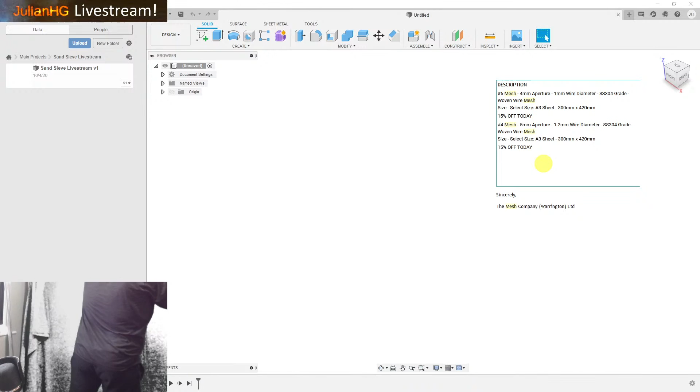I can see my shiny face. Oh, I forgot to do my green screen. One sec. See, I'm such a pro. Right. Oh, right, calm down.

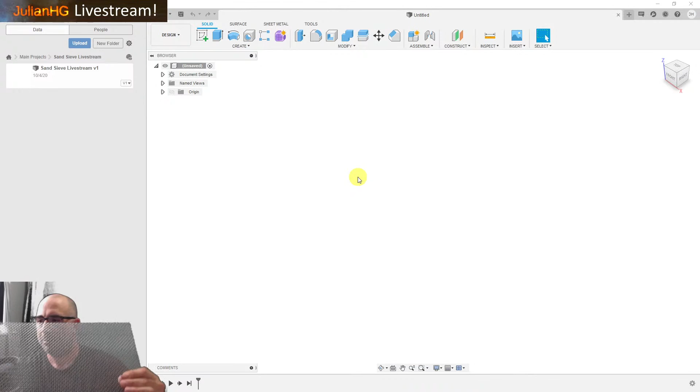And print it, and then in part 2 of this we'll be casting it. Now the plan is, I don't know if you can see this, but I've purchased a sieve. It's actually stainless steel. So the problem with greensand casting is it's always the sand prep, and all I've got is a gardener's sieve, and the wire mesh on it is actually quite sharp, a bit like cheese wire.

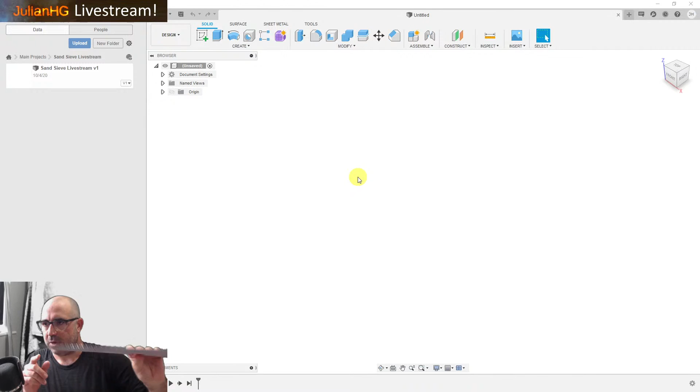So my plan is to cast a shape through this, or with it, so it's kind of cast into it, if you see what I mean. Let me just see if I can - yeah, the plan is to make a sieve shape in the drag, and the bottom of the sieve in the cope, and then cut this out in the particular shape required and put that between the two. Now this does have thickness, so there's a little bit of a difficulty - obviously the cope and the drag might not sit together nicely. I mean, it is a sieve, it will compress slightly in the sand, but there are some problems.

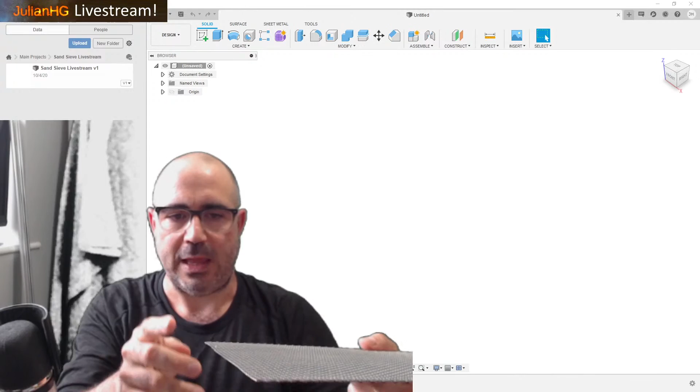I want the aluminium to flow up to the edge and across the sharp edges here, but I don't want it to keep flowing in the gap and basically fill the whole thing, becoming an aluminium sheet with steel reinforcing. That would be really bad. Equally, once the aluminium is flowing in, it might actually spill out of the gap.

Because the cope and the drag are actually separated by the mesh, I don't know whether to make a pattern for the mesh, and when I'm doing the cope and the drag, actually account for that thickness. I think that's probably the way to do it.

But anyway, let's actually get going on Fusion 360.

Now, I know most of you guys know all about designing patterns and things, but I'm just going to talk as if you aren't my main audience and start from basics. So obviously when you're sand casting, you want a pattern that you push the sand aside with, then you remove the pattern, and it leaves a void in the sand. You then fill that void with metal, it fills the void, and you've got a solid object made of metal, the same shape as the pattern. That's basically what casting is.

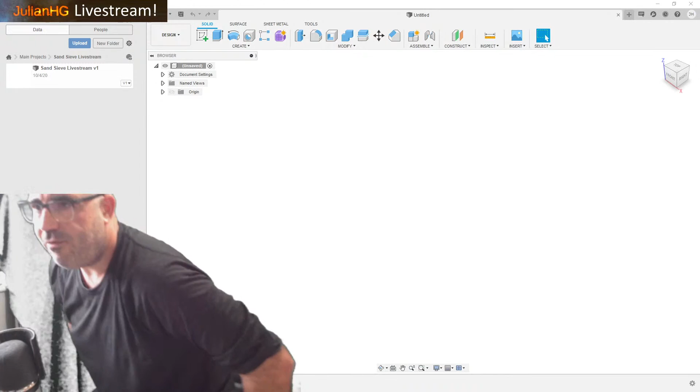Let me just shrink myself here. Oh, look at my terrible green screen, what's going on there? Let me sort that out. I'm doing some office upgrades, and actually I need a proper green curtain, like a curtain rail I can hang it on, because there's a big bunch of shelves there, but they end, and there's another corner. Anyway, irrelevant.

So let me just shrink myself down here. The first thing I'm going to do is the shape of the flask. I've written down all my flask sizes because I've made this mistake before - make a pattern you think is an awesome idea, and then it won't fit in your flask. There needs to be a bit of a gap around it. So this is a completely brand new design in Fusion.

I'm going to create a sketch, and have it centered. Can you guys see that? So let me do the actual outline of the inside of my flask - this is my largest, 317 by 435. So let's do 317.

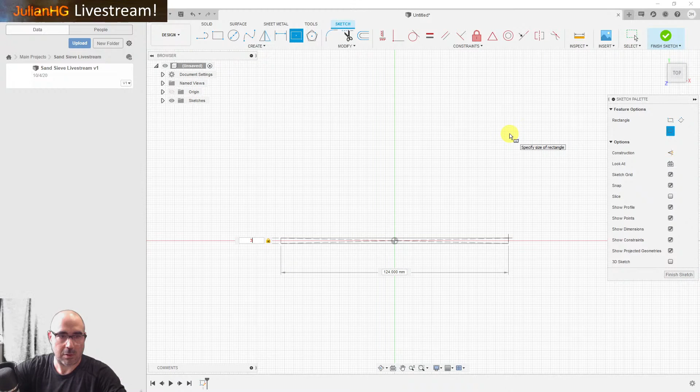Oh my goodness. I cleaned my keyboard and some of my keys aren't working. Brilliant. 435. Okay.

Oh, I've also got to show you guys this thing - I got this about two months ago. It's a mouse, but a digitizer, specifically meant for 3D applications. So I've got a mouse as well, and I use one of these rollerball mouse things, but using this I can spin and look at stuff at the same time as pointing with the other mouse. See, I've ruined it now.

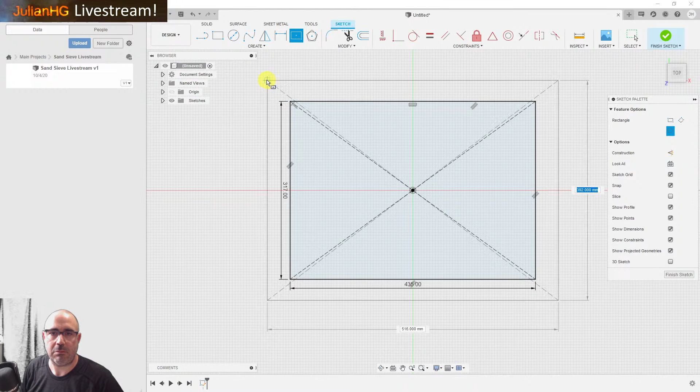Right, let's get organized. So this is the shape of the inside of my flask. I'm just arbitrarily going to make it - I don't know, that isn't the actual shape of the flask, but let's just make a flask.

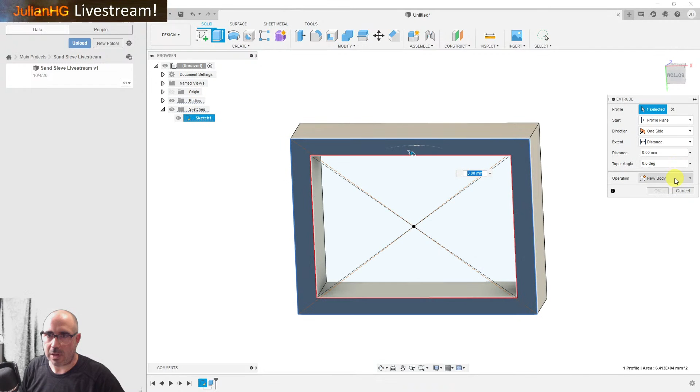Now the flask itself is 132 in depth. New body. I'm going to make the cope and the... silly boy. Okay, so I'm going to make a new body, this one's 99, so I need to make that minus 99.

So this was the flask I used to do my kettlebells. And it's huge. Oh no, what an idiot. Okay.

New body. Oh my goodness, I don't know what's happened. Minus 99, new body. Okay, phew, right, what a plonker.

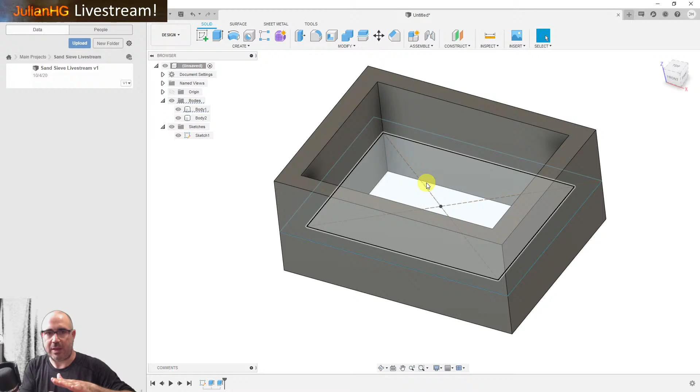So that's essentially the size of the flask, and this blue rectangle in the middle is where the sand meets, and that's the parting line. So that is where the mesh is going to go on this flask, on this sieve. So basically I'm going to leave it like that, and now I'm going to start a new sketch, and now we're going to do the actual sieve.

Now I reckon I need a sieve that is 26 centimeters by 26 centimeters. Something's going on with my keyboard - really bad, I shouldn't have bothered cleaning it, should I? I was so embarrassed by the state of it. Okay, so that's 260 by 260.

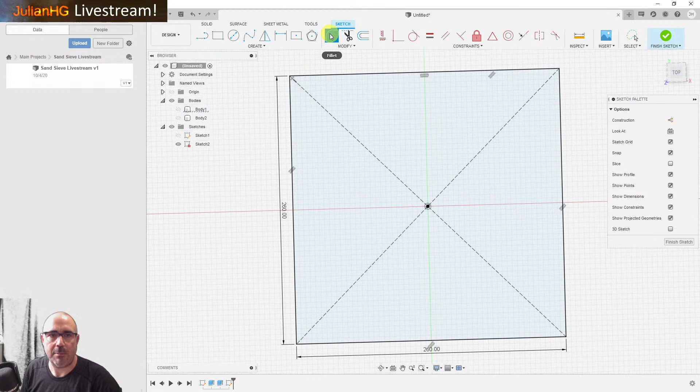Because we're casting it - yeah, thanks Taz, I will do that - and because we're going to cast it, I might as well make it nice and curved on the edges. Now I'm not an expert on Fusion 360 by any means, but I discovered this fillet option here, and you can literally pick two corners, and I think a radius of 30 would be nice. So this is actually a very simple design, it shouldn't take too long.

Radius of 30, and again last one.

Okay, so that's the outside dimension of the sieve, and once I add this offset, I think you'll see where I'm getting to. Now the base of the sieve at the parting line needs to be about 10 millimeters wide, which is quite wide, but I need it to be able to kind of flow onto some mesh. So I need at least 5 millimeters of mesh to grab it. Another problem that could occur is the mesh might warp once the molten aluminium is poured in. Basically, this is literally just a bit of fun, I don't know what will happen. So I think 10 millimeters.

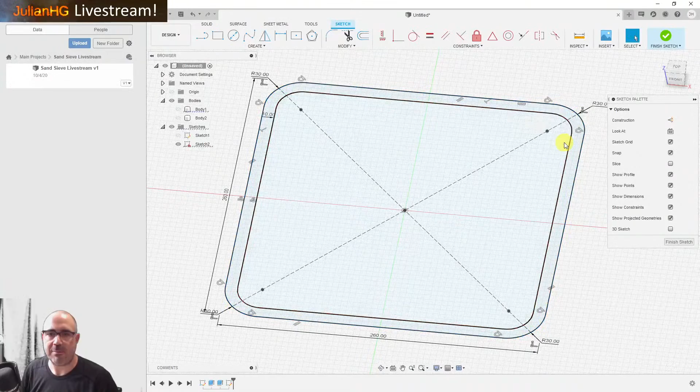And essentially that is the sieve, sliced through the parting line, and all we're going to do is extrude the top. But being a sand casting type operation, we're going to do some draft on it. Now, because it's quite tall, I'm actually going to have a very slight draft of -3 degrees, and I want the whole thing to have draft to it. That's to enable it to be pulled out of the sand. I've written some measurements here. One sec. Okay, so I think I want to make it 60 high.

So essentially that is the top part of the sieve, and this sort of edge here, in fact I might put the mesh in. Let's put the mesh in.

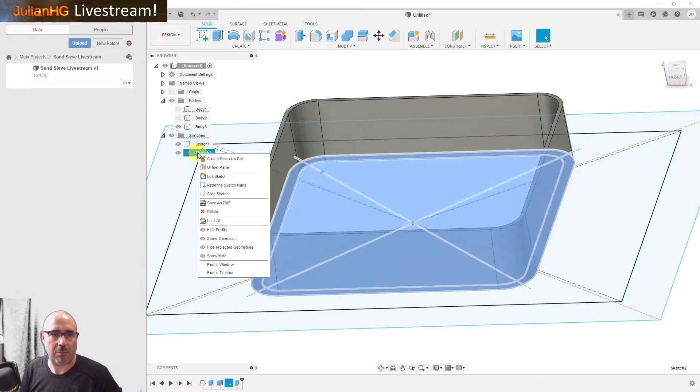What we need to do is for the mesh, can I do another offset? Okay, don't be like that. I know, finish sketch, I'll do another sketch. Create sketch on the same plane. And what I will do is, let me get rid of that, I will project. Sometimes Fusion does do some silly things. I will project the sketch through from the other sketch onto this sketch.

Okay, so hopefully, yes, I'll be able to offset. Basically, I want it to be the same shape as this, the mesh. This is just a simulation for the mesh, obviously. Now I want the mesh to go inside the aluminium. By how much? I don't know. I reckon 4 millimeters, I guess that's a good size. Maybe let's go with 5. I can always sort of adjust, this is just kind of guesswork.

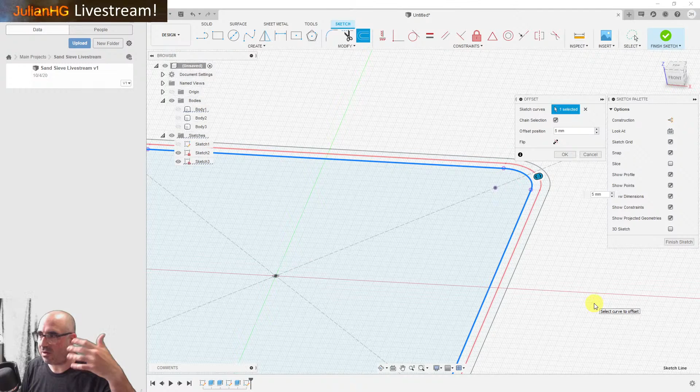SW Dweeb, hello mate, how's it going?

So the mesh, incidentally, I think I spoke to Perry, SW Dweeb, about my sieve idea, I don't know, was it like a year ago? And you'd had a similar idea yourself. So right, what's going on here? Okay, so I can select that and that. Now the mesh, I'm just going to make, I think the mesh is 3 millimeters.

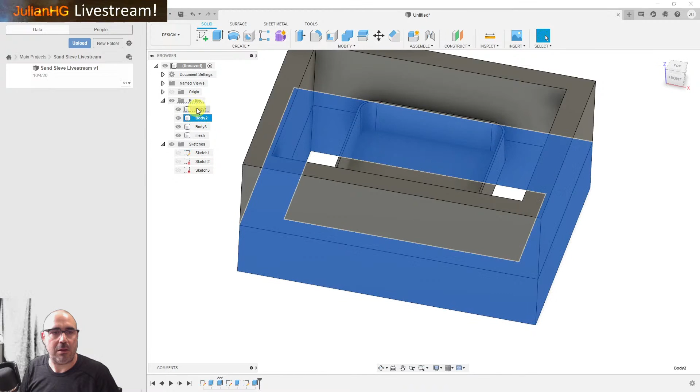I'm just going to label up my. Now let's add. So now we've got the cope, the drag, the mesh, the top of the sieve. Let's actually, that one there is the drag. This one is the cope. I'm going to call this the. What am I going to call this? Top of sieve. By the way, can I just formally say that the word sieve is a terrible word, I cannot spell it.

Let's get rid of the drag and the cope. So right, that's the sieve. And as you can see, I might actually colour the, I'm going to colour the mesh.

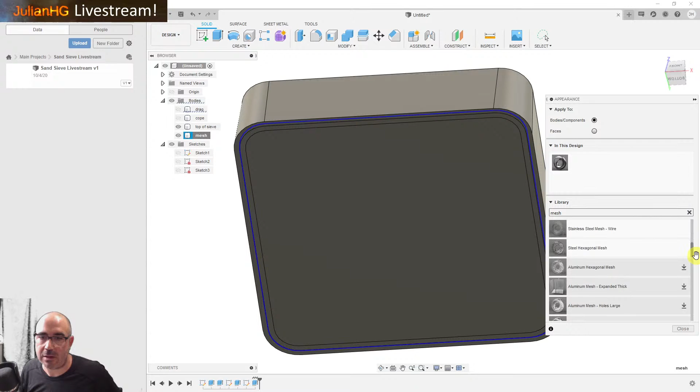Favourites, now I've got some favourites down here. Ooh, have I actually got mesh? Oh, stainless steel mesh, that'll do. Hexagonal mesh, stainless steel mesh wire, that'll do. Okay, so perfect.

Yes, Tobo, I think that is a good idea, because it does have thickness and because it's got such a large area, I don't think the cope and the drag are going to sit nicely together. It's not like you're putting a little tiny inch by inch bit of mesh on there and it will just squish through, the sand won't squish through. So I think that will be a good idea. But whether it needs to be in the drag side or the cope side, I don't know.

Perry says, I keep thinking I need to make one of these as well. I was assuming I'd cast the mesh into the sides. Yes, that's exactly what I'm going to try and do. But when I'm making the mold, I'm pretty sure the mesh, because it's quite big, will separate the cope and the drag, and I don't want aluminium pouring out the sides.

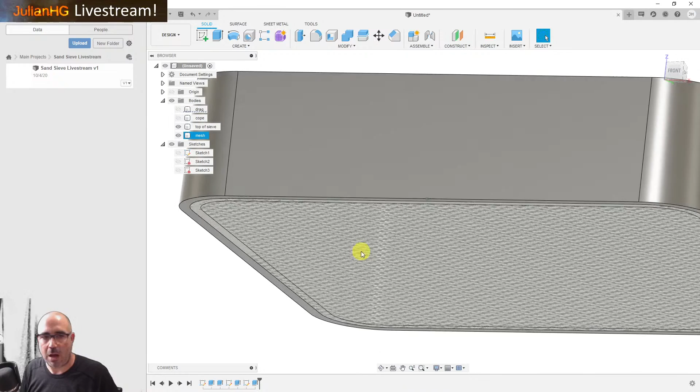So yeah, I think that's a good idea, Tobo. I think that is the plan. Essentially, I'm going to 3D print the mesh thickness, but by how much I don't know.

Also, another problem is, once the aluminium goes into here, there's not a lot to stop it flowing into the mesh itself, which is good because that's where it's going to be held, but there's not a lot to stop it. I'm hoping it will stop at least once it hits one of these horizontal wires. I don't want it to keep flowing in and out, because the mesh is obviously like a weave, not actually a wall to stop the aluminium. So I don't know, I'm hoping it'll cool when it hits the mesh itself, but not so much that it doesn't actually impinge a little and hold it in.

So right, we're nearly there. All we've got to do now is do the bottom, and all I'm going to do is select the bottom there and extrude it out. Now, I don't know, I'm saying maybe 10. I'm literally making this up. 10 millimeters, and I can afford a larger taper on this side.

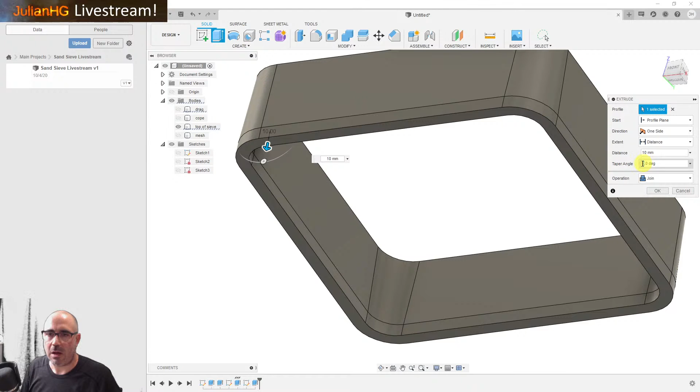7, that seems a bit much. Let's do a 6 because it's only small. Because I actually want a bit of the width here, because I might put one of my... Actually, no, let's go with 7, try and reduce some of the aluminium. So I don't want to join, I want to make a new body.

Okay, so this is bottom of sieve. Is it EI or IE? It's IE. All right, so that is essentially the whole thing.

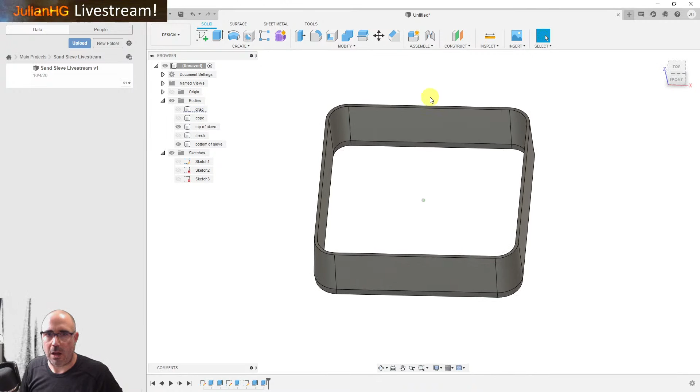Now I just need to think about how I'm going to print it. Now the trouble is, this is too big for my printer. So what I like to do normally, especially if I've been fairly careful from the start like I have now, I've designed the whole thing with this origin dead center. So it's actually very easy in Fusion to just grab a whole what they call a body.

This top of sieve is called a body, and I can just slice it. So I'm going to split the body, and I'm going to use the origin. I'm going to split it down the whatever that is, I think that's probably the X, Y, or Z, it's one of those two. So I can split that. So that is now split into 2, I've got this side and this side.

Now I'm actually going to split it again, because essentially what I'm going to do is print it in quarters, because then hopefully I'll be able to stack them like chevrons on my 3D printer. I'll certainly be able to do 2. But that does give another problem.

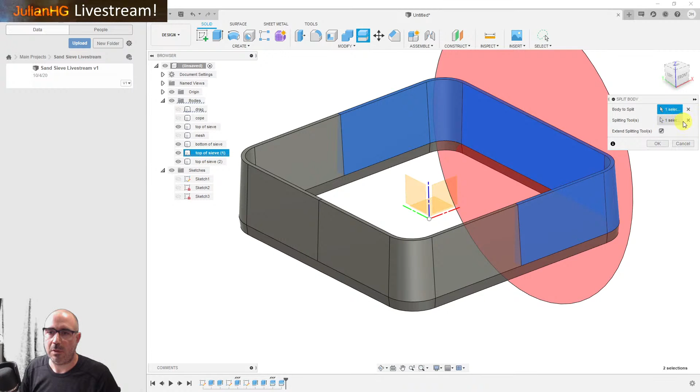So I'll split this one, and I will use this axis. As you can see, it's going to slice it through there where the pink is. Great, and do the same for this one. Splitting tool there, got a bit confused. Right, so that is the top of the sieve, split into 4.

I need to do the same for the bottom of the sieve. So I'll select that, split this using the same 2 axes. That's that one done, now I just select this.

Incidentally, Perry, did you see my fancy mouse? I don't think you were here at the start when I mentioned it. It's so cool, I think you'll be very jealous.

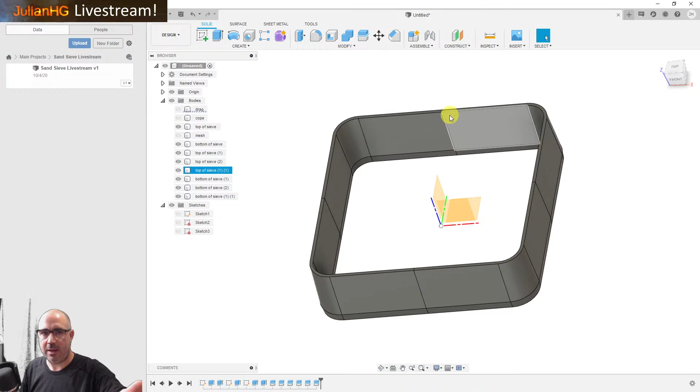And I'll just split this one as well. Okay, so that is the top into 4 parts and the bottom into 4 parts. And because it's square, essentially, we can actually just print one corner and do it 4 times, if you see what I mean. This could be modular in a way. I could make an extension piece in the middle if I wanted a rectangular one.

So the trouble is, because this is going to be printed in 4 corners, not all in one go, I don't have a big enough printer, I'm going to need some sort of registration thing going on to keep everything together. And it's also nice when you're pulling out the pattern, if they're all really flimsily held together with superglue, if you pull out the pattern, there's a good chance you might pull the pattern apart and just ruin everything. So I'm actually going to, let's see, which ones are we going to use?

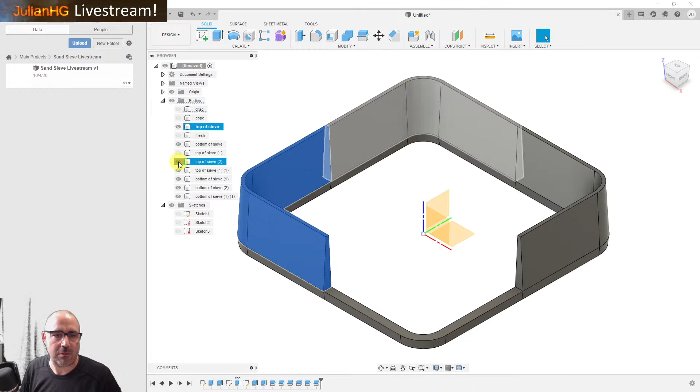When I go like that, okay, perfect. So I'm going to use top of sieve, I'm going to keep that one, I'm going to hide these. And I want this one. Perfect, I'll hide all of these. So that's really what our sieve has come down to.

In fact, I'm going to colour this. Appearance, I'm going to make the top green for no real reason. And the bottom I shall make red.

I hope you can't hear my... Oh, you didn't hear that? Did I see what? You didn't see my fancy... I hope you didn't hear my stomach rumbling. It's because I've just scoffed a sandwich in about 30 seconds.

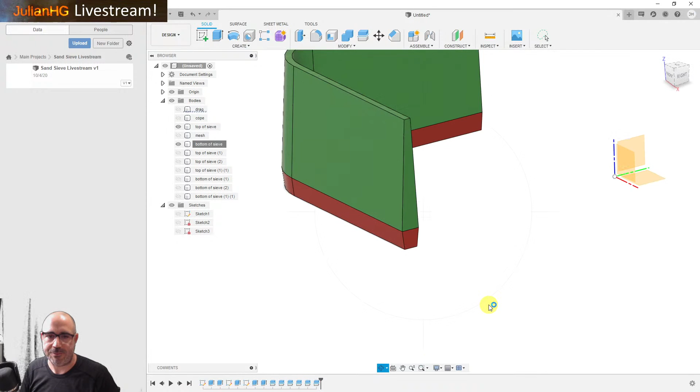Check this out, Perry. This is an amazing 3D mouse. I can pull and push, rotate, spin. It's super fancy, and it's also lovely and smooth. Before I had this mouse, I would have to use this other thing and kind of be jerking around, and it's just no good.

When I print this, I'm going to print 4 of these, and I'm also going to print 4 of these. Now the flat bottoms where they meet, that'll be the bottom of the print surface. That'll be nice and flat, so when they're in the pattern they will meet nicely.

And I need a few things. I need to be able to registrate, so I need registration pins, the ones I use on all my patterns now. Let me zoom in - see these little things here? Super small, but they have extremely good tolerances and they're really cheap. I get them off Amazon.

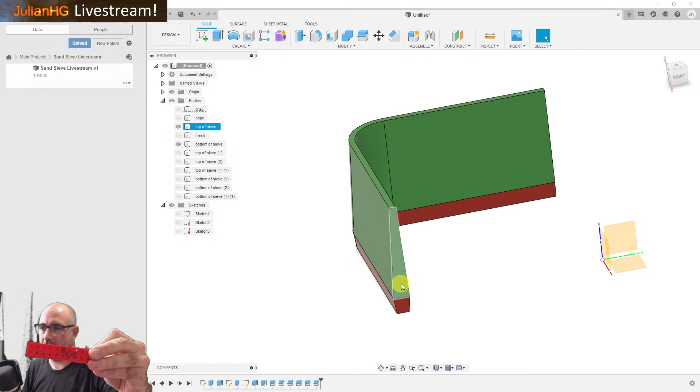So let's see, we've got the top of the sieve. I'm actually going to do the sides first. Now I know from experience, I printed a little block here on my 3D printer, and I know that for a nice loose fit, it's like 3.2 millimeters, 3.25. Actually this one's 3.3, and that's a nice loose fit.

But if I want a nice tight fit, i.e. holding the bits together so they don't come apart, I've written it down here, 3.15. So if I make a hole of diameter 3.15, this is a really nice tight press fit.

So what I'm going to do is put a hole here - sketch, circle - I'm going to zoom in. So I think, now what's that, 5 millimeters? So I'm literally going to put a circle there, 3.15.

I'm only going to make one of these pins. So this is going to be my pin here. I've made a circle, and like everything in these 3D softwares, you essentially just extrude.

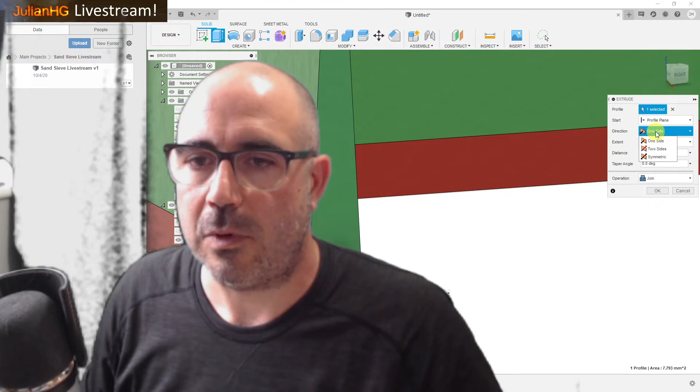Now I'm actually going to do it symmetrically, and do the whole length, and make the whole thing. Now the pin is actually 25mm, but I want the hole to be 27mm, so there's a little bit of play in case a bit of plastic gets stuck in there. There's nothing so annoying as putting your pins together and then the actual parts won't squeeze together. So a little bit of leeway is good.

So I'm going to make a new body, and this is like the negative of the hole I want. So this is now - there's the pin there. It's 27 long instead of 25, but it's the right width for a tight fit. Okay, so I'm going to call this pin 1.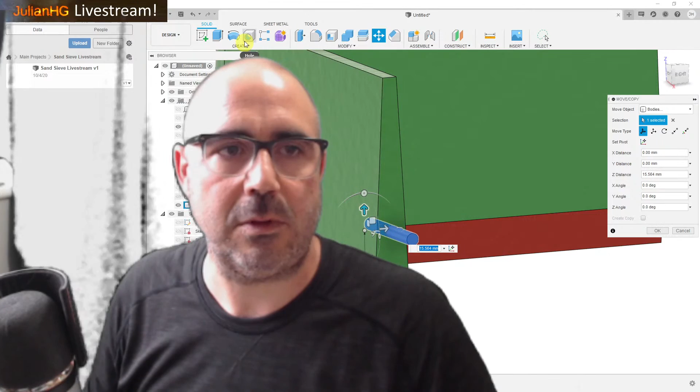Now I'm actually going to copy this part. Super easy - right click, copy. So right click, move - and when I'm moving something, I can also copy it if I click this. So I click copy, shove it up.

Now I've got to be a bit careful. I want another pin up here as well. So don't forget, these pins are to join the 4 quarters together nice and tightly. But if I put them too high up, it's going to impinge on the side. Now when you're 3D printing, it's a bit like toothpaste coming out of a tube - there needs to be a certain amount of thickness around a part, and from experience, this is too high. I need it to be - I'd say around here is probably fine.

So why don't I just make this 27? Okay, so I've moved that pin up here, 27 from where it was down there. So now I've got 2 pins.

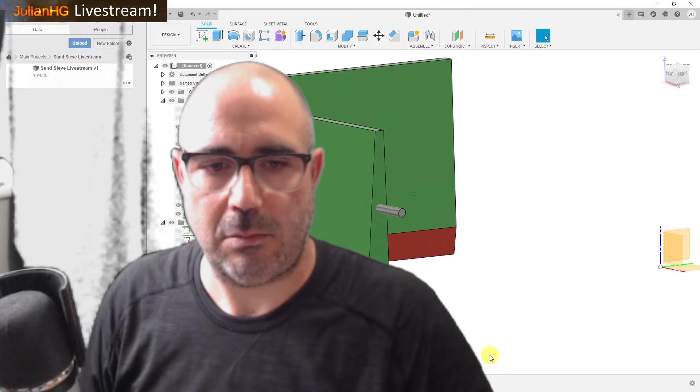Perfect. Actually, I should have been a bit more cunning. What I like to do also is just put a tiny chamfer on the hole. It just makes it a bit more accurate. 0.3, so I'm going to have to do it for all 4 of them now, which is kind of annoying. The 4 ends. Okay, so chamfer 0.3. As you can see, when this gets printed, there won't be such a... I mean it's only a small thing, it's 0.3 millimeters, but I like to put a little bit of chamfer on things when I can. So right, there are the pins.

Now I'm actually going to move, I'm going to copy this one and put it down here too. I'm going to put one in here, and it looks to me like 10 millimeters is just where we want that.

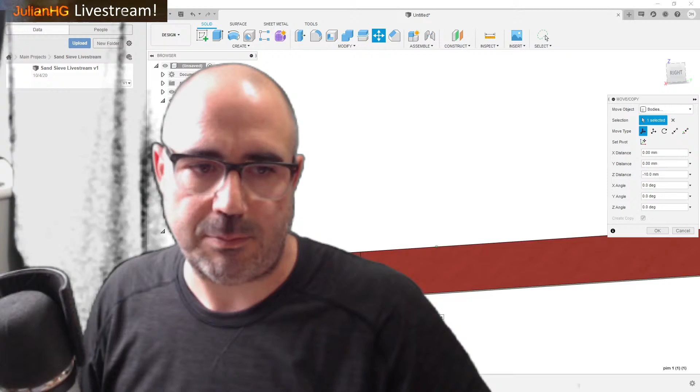Oh, I'm sorry, my face is so massive. Can't see over your shoulder. Thanks Paul, sorry, I wasn't looking at the chat. I need to do like 6 things at once. I've got to tell you, it's a miracle it's going this well. Seriously.

Okay, I'm about the right size now. So that's a 3rd pin. So now I've got 3 pins.

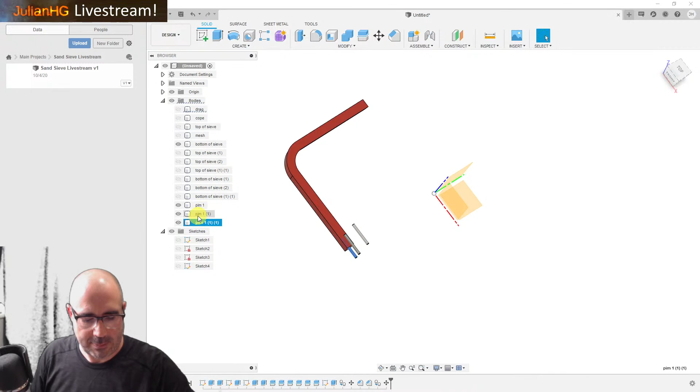And the beauty of this is, if I want to get fancy, I can actually, because I've made it around a square, select these 3 pins, right click, move and copy, and make another copy. So I've got 6 pins now. Each one of those blue things is actually 2 pins together, but I can rotate those around the origin. So I can select this pivot and make it the origin. And then I can spin it around. So there we go, I've got 6 pins now and they're all in the right place. So I click OK.

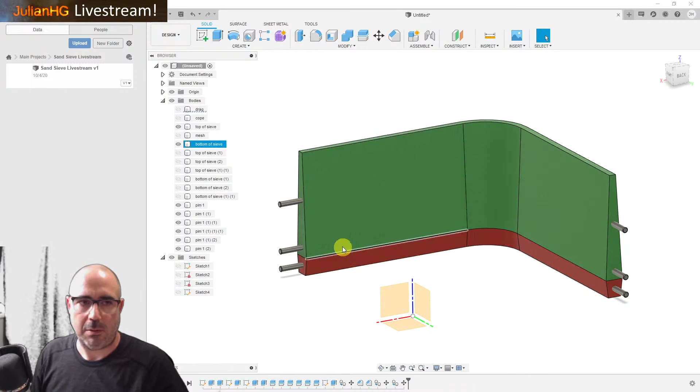Perfect. Now if I put top of the sieve back, essentially this is the whole thing done now. What I might do is put 1 pin going vertically between the 2 patterns. I don't know, I think I should probably do that just for completeness.

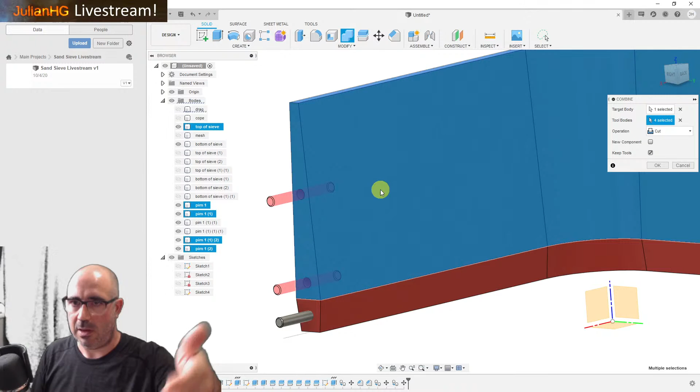But what I'll do now is just show you how to make this, in case someone's watching that doesn't know how to do it. You select the part you want to make the hole in. Basically lots of these programs work by subtraction and addition of solids. Because I've made this pin, this is the shape I want the hole to be, not the pin, I can select this whole object and combine it with these things here. I've got it set to cut, and it's going to cut those pins out of this blue body. Now I'm selecting keep tools because I actually want to use these tools, I want to keep them. If you had that unselected, it would use up these pins in this operation, but I want to hang on to them. So I'm going to keep the tools and click OK.

Now what you'll see is, if I just delete that, now we've got a hole. And not only that, it's actually chamfered at the back. Okay? And same for this one, and the same at the other end too. So I'm going to delete that.

Not delete it, I'm just going to hide it. And I hide that. Now I'm going to do the same operation for this bottom of sieve. So I select bottom of sieve, combine it, select my tool bodies, that's already set to cut, it was what it was on before. Select the pins, I'm keeping the tools. Okay, now I can hide those pins.

And voila, super duper. Basically, if I just print 4 of those green corners and 4 of these red corners, that would be the entire sieve pattern.

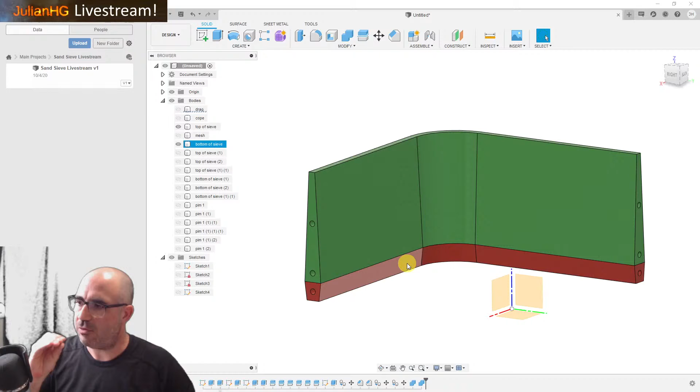I think I'm going to have to account for, like Tobo mentioned before, the width of the mesh, but I possibly... how long have I been streaming for? Oh my goodness, for 39 minutes. I probably won't do that now.

If I put the mesh in, you can see here the idea. Essentially, I'm not really sure where I'm going to put it yet. I think I probably will put it in the green, which is the drag. But the mesh, so it's going to be like this. In fact, let's do this properly.

Top of sieve, I want to hide the bottom. Top of sieve, top of sieve, top of sieve. Okay.

And we want the drag. So, essentially, I've rammed it full of sand. And I think where this mesh is, I need to have - well, it's obviously when I'm ramming it up, it'll be this way up. But where this mesh is, I think the red side will be easier to draw out of the mold.

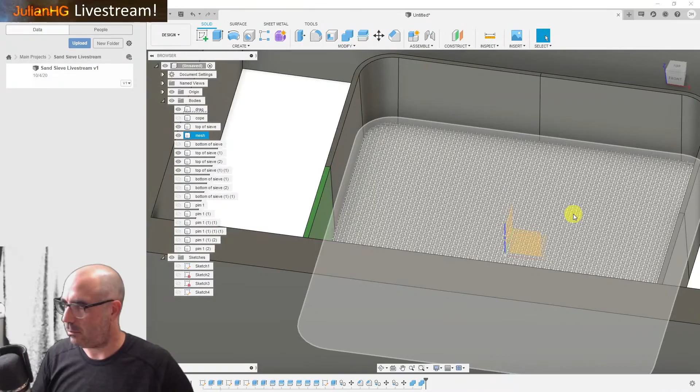Yeah, you're probably right. I'm only putting it on this side because of the kind of small size of the red. My goodness, my brain. But basically, it doesn't matter which way.

What I'll do is print, like Tobo said, and this was my original plan, a spacer that would take up the space of the grid, the mesh. That will enable, hopefully, assuming I've cut the grid roughly carefully to the right shape, that that will stop the drag and the cope separating and aluminium pouring out the sides, or places where it shouldn't, if you see what I mean. So that's the kind of plan, and I'm hoping at this boundary where they join, that's what's going to hold the mesh in the actual sieve.

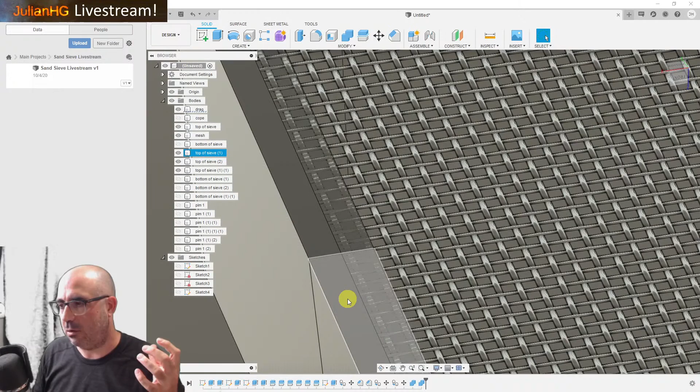But like I said before, the mesh might get too hot, it might warp. It might warp while it's molten.

YouTube's telling me the stream has gone bad. It's got 4 bars still. I'm just going to plow on.

But it might sort of warp, it might expand once the mesh is hot, but then it might kind of freeze whilst it's bowed and hot. I don't know, it could be a total disaster, but it's kind of a nice exercise - I wonder what will happen. Also, it'd be nice to have a little sand sieve that's got nice round corners.

I've got a feeling when you look at the sieve finished, there's going to be quite a bit of aluminium overspill in these first rows of the grill, of the kind of grid. I don't know, that's probably going to be a thing, but it's a bit of a fun experiment.

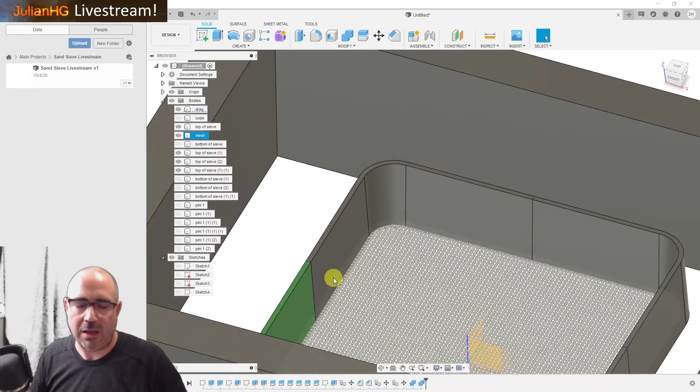So I'm going to get rid of the drag. I'm going to bring back the bottom of the sieve. In fact, I'm going to get rid of all the extraneous stuff that we don't need. So we're back to this.

Now I'm going to quickly take one of these pins. I'm actually going to put a pin here between the two. Let's copy this, move and copy. Create a copy, so I'm going to move it

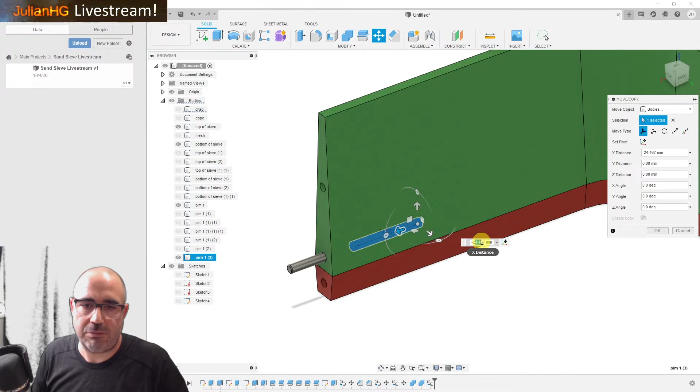that way by an arbitrary amount - let's say 16. What happened there? Oh, I did 600. Of course I did. 60.

Right, and let me just... Right, I want to rotate this now. What's half of 27? 13.5. So now I need to reduce this by height to 13.5.

Because that's the total length of the pin. Hopefully the stream is working.

I'm still seeing problems on my little widget here. Can you guys still see?

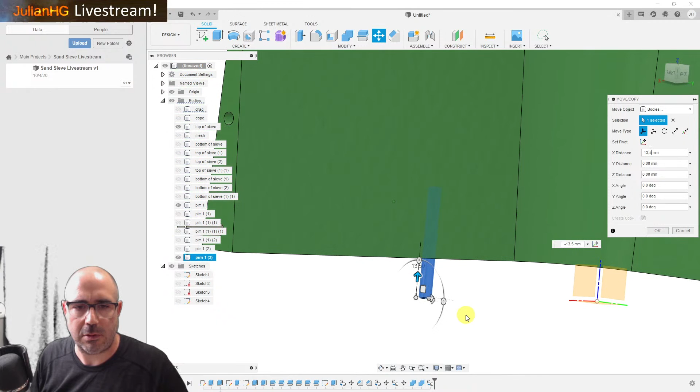And so that's this pin here. And, oh, that doesn't seem right. 13.5. That's not enough, is it? Oh, it's because it's a certain height above here.

Working fine at my end. Brill, thank you Tobo, thank you Paul.

So what's the height of that? I think it might be 5. I think I might just need to add 5. 13.5, 3, 4, 5, 6, 7, 8, so it's 18.5, let's try that. No, let's do the other way - maybe it's 4, let's do 17.5. That looks about right, okay.

So that pin goes there. And like before, I'm just going to essentially copy this pin. Oh, I've called it PIM. God, my eyes are terrible. Pin, vertical pin, so I'm going to copy that. I'm actually going to put another one in.

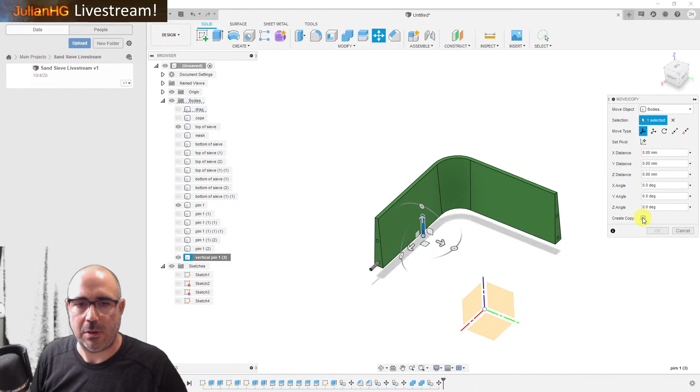Do I need... let me think, well, let's try it. I'm not sure if it'll work the same. Select pivot. This might not work out. It's difficult for me to think whilst doing all this technical stuff.

Gotta go, see you Perry. Nice to see you, mate.

Now, at what angle? See, this is the trouble. At what angle is it in the middle? Yeah, not ideal. Well, I can do... yeah, so let's forget that.

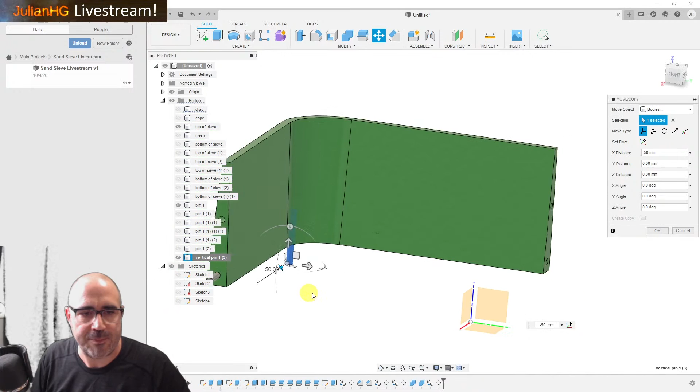What I'm going to do is just copy one and move it by move copy. So let's look at it this end on and just go like this. Oh look, it's 50, that's the beauty of keeping everything nice even numbers. So it's 50 that way, and it doesn't really matter.

Oh my goodness, I'm a numpty. I didn't copy it - move copy. I didn't select that copy. So let's go.

Got a feeling, let's call it 90, it doesn't really matter. And then we're going to move it this way. I think we said 50. Minus 50. Cool, all right.

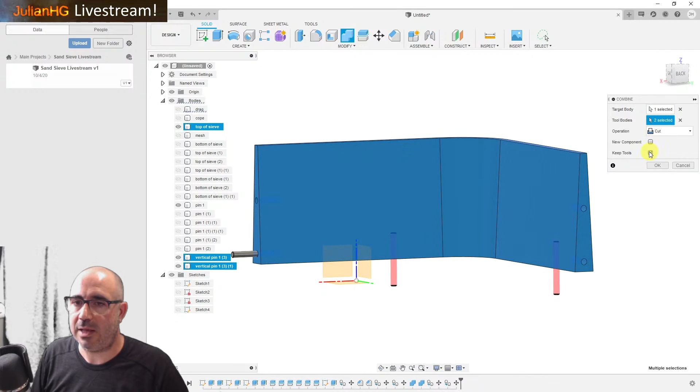So like before, essentially all I'm going to do is subtract these pins from the green part. I'm going to select the green part, which is top of sieve, combine, select the tool bodies which are going to be subtracted, and that's the pins. I'm going to keep the tools because I need them to do the same on the red bottom part too. So that's done.

If I just hide top of sieve and I now do it, now this is the trouble. Okay, see, unforeseen circumstance. So obviously these pins are too long.

So what I can do is select that pin and that pin, move. Now let's move them up so that they're not sticking out the bottom. If I click there, so that means the bottom of them is right on the surface there. So I want them to actually go up. Let's say I want at least, yeah, let's just say 6.5.

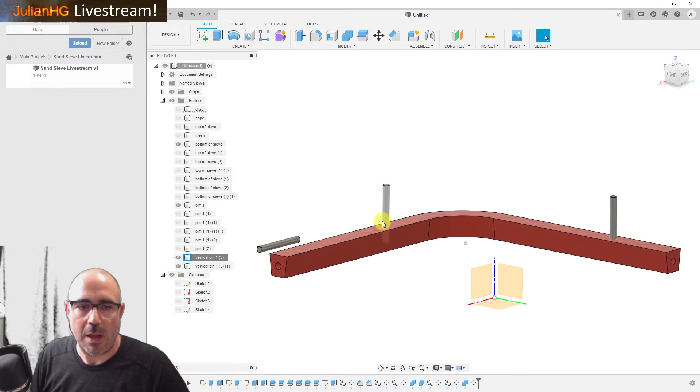Okay, so now they're mainly in the top half, but it means that I need to subtract them again because otherwise the holes won't be big enough. So let's hide the bottom of the sieve, select the top part, combine. Let's remove these now large, higher up holes. Okay. Hide the top, reveal the bottom, and combine that with tool bodies, just subtract again.

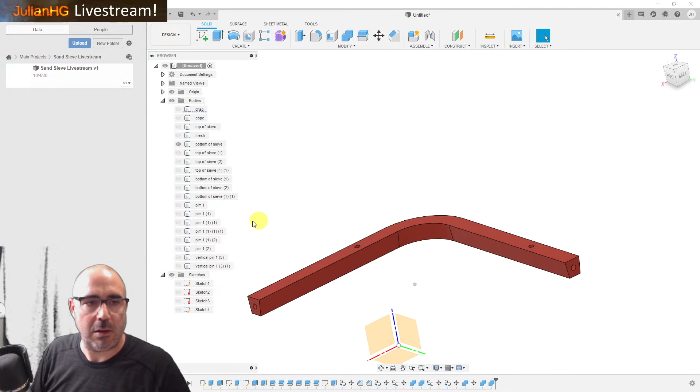Now if I remove all these pins, hopefully there are holes all over this thing that line up with holes there. So basically with those pins put in, this would be held together decently, I think.

Because I don't actually like to glue my patterns together, because I don't know why. I like to be able to change my mind and make a new piece. So now I'm using pins rather than glue.

I could make it super easy. I'm not going to bother you guys with it now, but I could go like this, ignoring the pinhole, and make an extension piece that was 50, not 5,000, 50, like that, new body, and I could print that, and then I could have the four corners and insert the two sides, a bit like the modular flask. It could be modular and you could change the shape of things. I don't know, it's nice to be flexible rather than once you've glued something, you're kind of stuck with it.

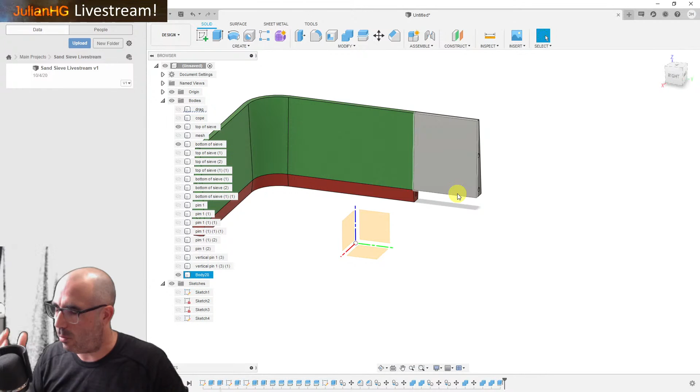So right, I'm going to get rid of that. That's pretty much it, except for, I think, making it a little bit more pleasing to touch at the moment, and also remove from the mold. This edge here is quite sharp. That's actually, what's the width of that? 3.7 millimeters, it says it down here.

What I might do in the next 10, I think if I can get this stream done in 10 minutes, that'll be awesome. So I'm going to just round over all the sharp edges and send one of these prints off for printing.

The mesh, what I will actually do is, I won't show you. In fact, I'm going to quickly show you now. I'm going to move. I'm going to make a copy. In fact, I'm going to move copy. I'm just going to copy and paste. Now, this is copy of mesh.

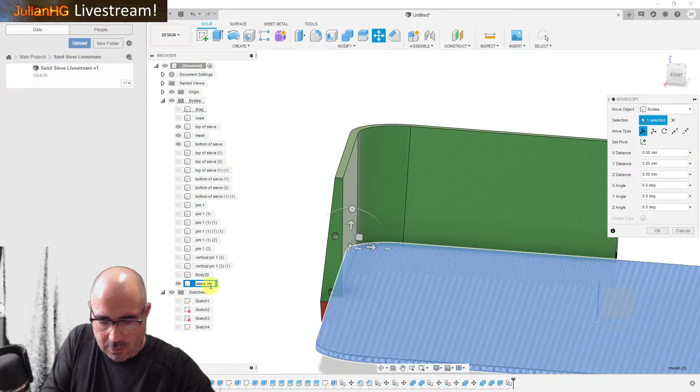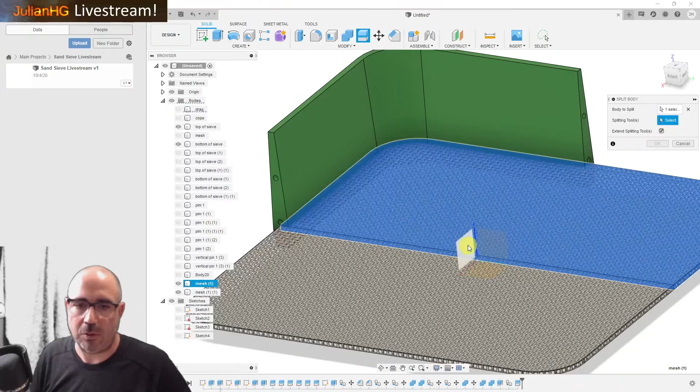So I think what we'll do is, just to show you here, this mesh, I'm going to split it. This is literally a quick example, and I'm going to split this part here. Oops, beep beep beep, body to split that one. Splitting tool, that one. Okay, so let's get rid of that and that. And then you see where it impinges here.

I'm actually going to remove that. So I'm going to select this mesh. I'm going to make it a different color now because this isn't a mesh anymore. This is a pattern for the mesh.

Ralph, this Fusion 360 is really good. Oh my God, you're going to get a 3D printer? Mate, it'll change your life. It's literally changed my life. Nikki, my wife, would probably say it's changed hers because of the lack of sleep. Our bedroom is directly above my office, and sometimes we just go to bed listening to 3D printing.

Okay, so what was I doing? Yes, I was going to, using subtraction, make a pattern for this mesh. So this is no longer the actual mesh, this is the pattern for the mesh. So I'm going to change its appearance just for ease, keep it nice and simple for us. Let's make it, what's a nice easy color? Yellow.

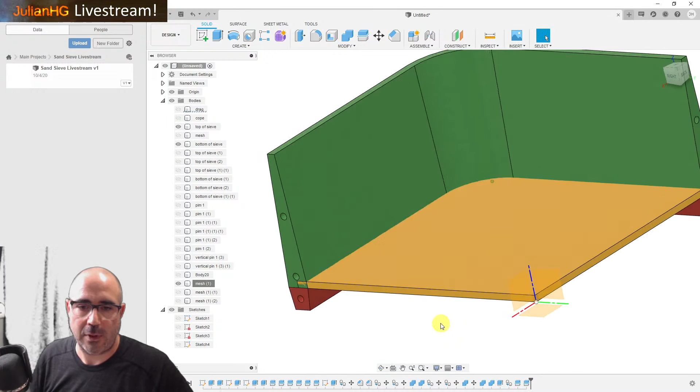I don't know about Fusion 360 versus FreeCAD, I know FreeCAD is good and it's free, which is great. I know there's been a little bit of controversy with Fusion 360 changing their plan. It's still free, you can still access all this stuff for free. You just have limitations on the number of active documents you can do at one time. But for simple stuff like this, the free version is more than enough.

So this pattern here for the mesh, I'm just showing you this, I probably won't do this exactly. I might finesse it slightly, maybe make the pattern for the mesh slightly thinner than it needs to be, because I think the sand will actually go between the mesh holes nicely. What I'm going to do is take the mesh and combine and subtract again, using the actual top of the sieve, and you can see it's now cutting the pattern of the mesh at the perfect angle, which in our case is 3 degrees, because that's the draft we gave it when doing the top of the sieve.

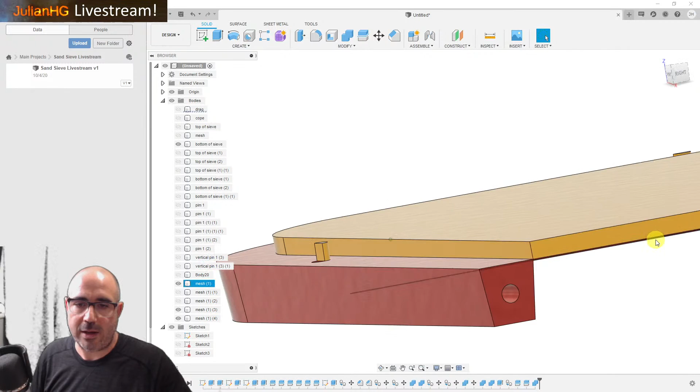I'm going to keep the drag because it's part of the sieve and I need it. Done. Now if I get rid of the top of the sieve, there you go. So I could 3D print this.

Now I wonder if I need to... because this is no longer... is it symmetrical? Yes, it is. So I don't need to make a mirrored version. If this was rectangular, I would have to make a mirrored version, but I don't need to. So really, we're almost there.

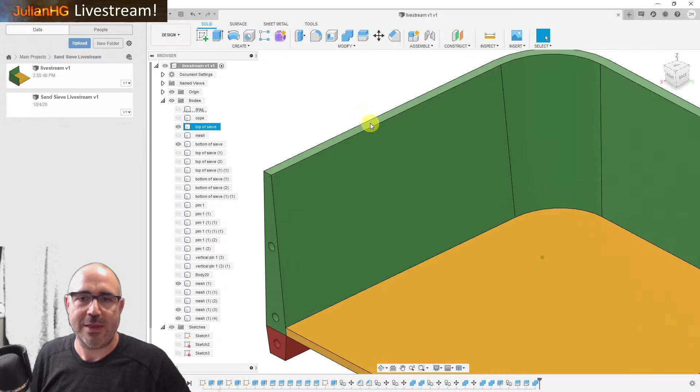Now, filleting. I love filleting. It's basically taking a sharp corner and rounding it over. It's nice for the touch, and it's also nice for removing parts from a pattern. Sorry, I'm looking over here at the chat while I'm talking to you guys, I should be looking at the camera. I'm such a noob. So what you do is you select fillet, and literally select any edge that you want to make rounded. Fusion is very, very good this way. I'm going to select more than one edge, and I'm going to say 1 millimeter.

Now, if I zoom in, it's only a little bit, look. It doesn't need to be huge. If I make it 2 millimeters, I don't know, to me it's actually reduced the height of it slightly. I could go 1.5. Yeah, that's quite nice. Maybe I'll go with 1.5, and that'll be a nice rounded over top.

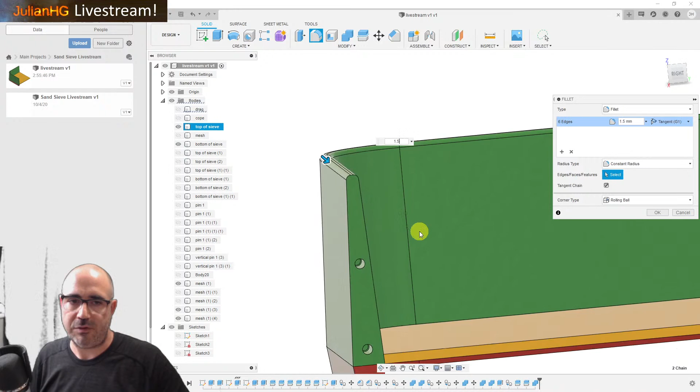So I click OK. Now that's permanent. Notice how I didn't do these edges, because these edges shouldn't be rounded over. These are actually going to be butting up to the other corners, so they need to be sharp and flat.

But equally, I'm going to do this. Oh my goodness, I moved my mouse thing slightly. So fillet those. Now let's do 2 on that. See, 2 on that is plenty, is perfect. Might even go 3. Yeah, 3, why not?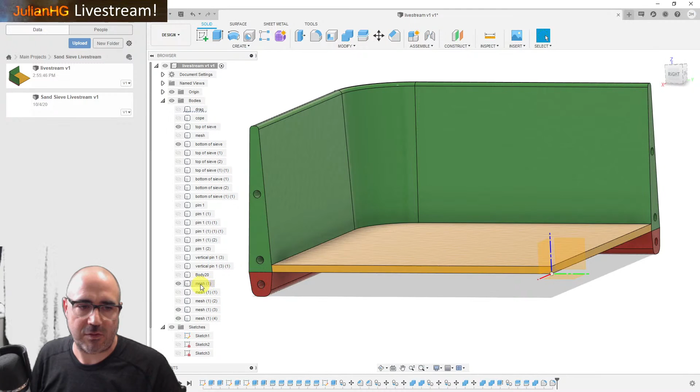So that's essentially the pattern for the sieve. Now I don't know whether yet, like Tobo mentioned earlier, whether to put this mesh pattern in the top. I could put it here, or if it was a different shape, I could put it here. So I could put it in the drag or the cope. It may be worth thinking about that more, but it's not something I can think about whilst also doing livestream and filling the dead air while I just sit here silently thinking. But I think that's essentially it.

Now all you do with Fusion 360, I don't know about other software, is you select the things you want to print, and it's super easy. You just go right click, save as STL, and...

Now this is off screen, but I'm just going to make a folder called Livestream. Just one sec while my ancient computer drives warm up. Honestly, I've got like 14 terabytes, a ridiculous amount of drives because of all my footage. I think I'm nearly at, I don't know, 12 terabytes or something. All right.

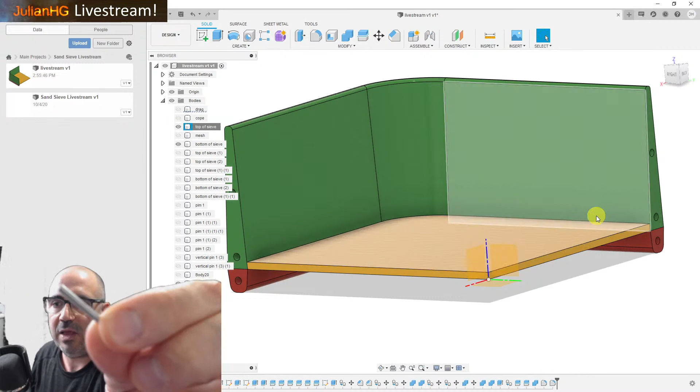So you literally save it, top of sieve, super simple. And let's save. So obviously the pins aren't needed, they're literally going to be physical, these things here, so they are going to be slotted inside those holes. So they don't need to be printed. I'm going to also need to print the bottom of the sieve.

Select Save As. All right, bottom of sieve. And why not? Let's do the mesh too.

Save as STL, mesh. Perfect.

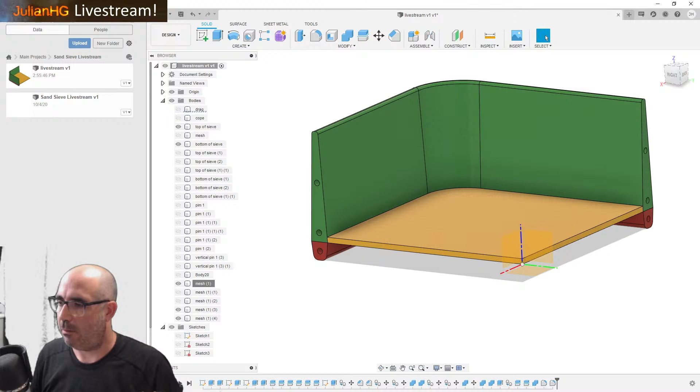But essentially, because I've got a Prusa slicer, because I've got a Prusa Mark III S, which is the latest version. I've actually upgraded it from the previous version, but it's a Prusa 3D printer, and here is literally a model of the print bed. Actually, here is something that I wanted to put into the model.

Now this is one of my nut traps that I really love. Let me go and get it. I actually printed it just now. One sec.

Right, let's make this nice and big. Now, can you see I've just printed this? This is the thing in the background here. I've just printed it. It's probably going to be out of focus, but it's an example of a nut trap.

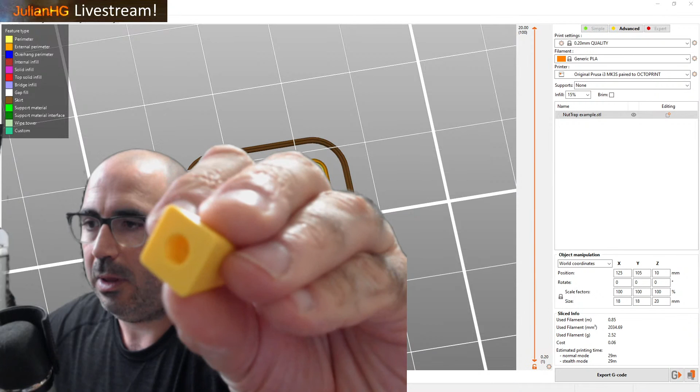Now, I used these on the modular flasks, and what you can do is you push - that's a perfect shape to 3D print upside down, and you can push I think it might be an M3 nut in there. And let me do that. So you can see I've pushed an M3 nut in there.

And if I push hard, I can push it all the way in. And this shape is particularly useful because you can get these little bolts that have got a kind of 45-degree head on them. And what you can do is - why is this useful?

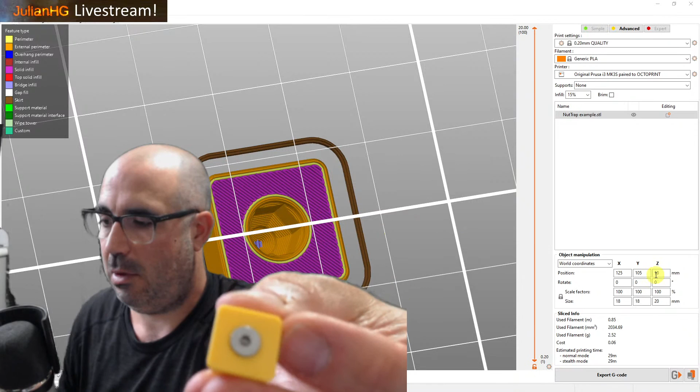Well, in a part like that sieve, where it's quite deep in the sand, if you put these shapes, like I would probably put - I was probably going to put a nut trap, I don't know, say here on each corner. And what you can do is, when you're ready to remove the pattern, unscrew that little flat bolt and then put in a regular sized bolt.

He says. Oh, incidentally, once you get a 3D printer, you can 3D print - like I've designed this little set of trays that hold all my nuts and bolts.

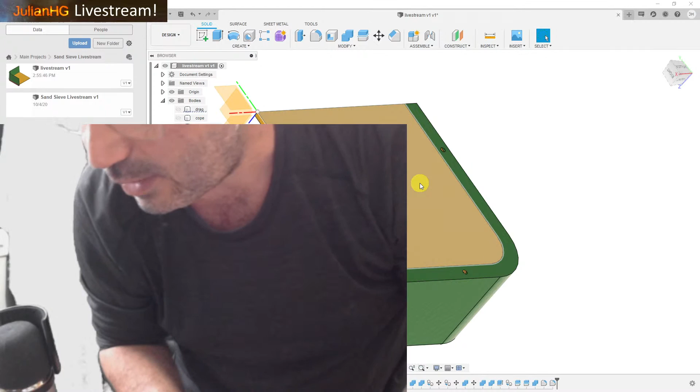So you can put that in there and then use it as a handle to pull your pattern out of the sand, because it's really difficult to pull long, thin patterns out of sand, particularly this kind of shape. You can imagine the friction on the sides here is quite high.

So I will probably - before I print these properly, but you don't need to see this because I think the stream is going on too long - I will just take this shape and subtract it from this green body here, so that when it comes to the actual casting, the actual making of the mold, I'll be able to remove it easily, I hope. I may even put it on the other side too.

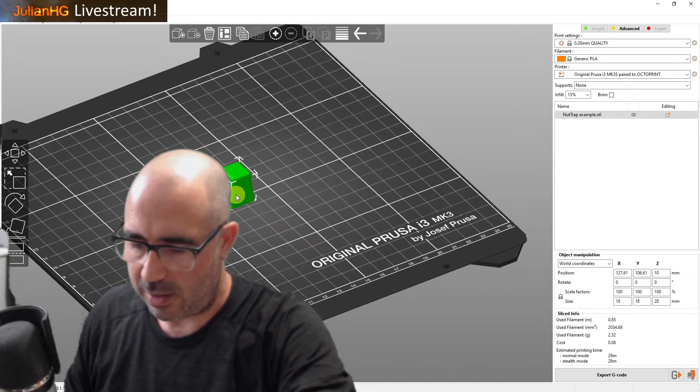But anyway, let me just quickly show you how you would print these things. So this is my slicing program. I'm going to delete that because I've already printed it. I will add - I've literally just selected all the bits that we saved from earlier.

Yeah, you can totally use the bolt for rapping the pattern. Thank you, Ralph, I also agree with you.

Brilliant, I'm very proud of that. I'm sure it's not even a real invention, but I just kind of thought, when I was doing the modular flasks, because they're so fiddly, and it just takes so long to do those molds, that I'm probably overly pleased with that ridiculously bad invention.

Right, so all I do is import those three things, and there we go, look. You've got the mesh pattern, so you've got the top of the flask - oh sorry, I've got flasks on the brain now. I've got the top of the sieve, I've got the bottom of the sieve, and I've got the pattern. Now I would need 4 sets of this.

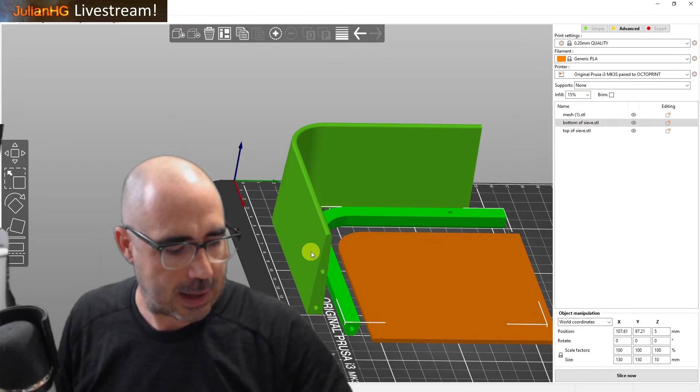Now you'll notice this part here - oh, this is weird, this mouse doesn't behave quite the same way in this slicer. Okay, so this part is the correct way up for printing. It's got its flat surface there, and it'll print up, with the rounded surface on top. Now I could totally print this part this way up, but it would make much more sense to flip it over and have the flat surface on the print bed, with the curved surface on top - it would make this curve more accurate. So I'm going to do that.

On Prusa Slicer it's super easy, you just go place on face. It's frozen... okay. You click place on face, and it highlights all the flat parts of the object, and this is the flat surface I want to use. There we go. So now you can see, if I move this out of the way, it's now being printed the right way up.

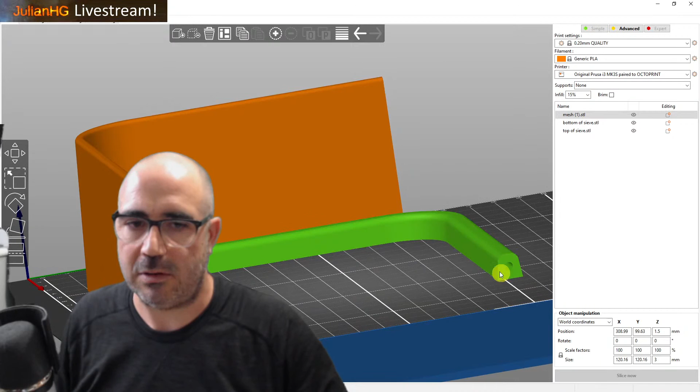Now for space saving, I'm also going to rotate it. Super easy on Prusa Slicer. There we go. Now this piece I think is fine, there's like a little overhang of 3 degrees, we don't care about that, that's fine. So that can be printed that way up too.

So all I would do to print these as they are - now actually I could probably get rid of those, and I wonder if I could print copy, and I wonder if I could go 1, 2, 3. I wonder if I could print all 4 at once, do you see what I mean? I could wedge them in. Probably not, probably not, but you could certainly do half of it if you see what I mean.

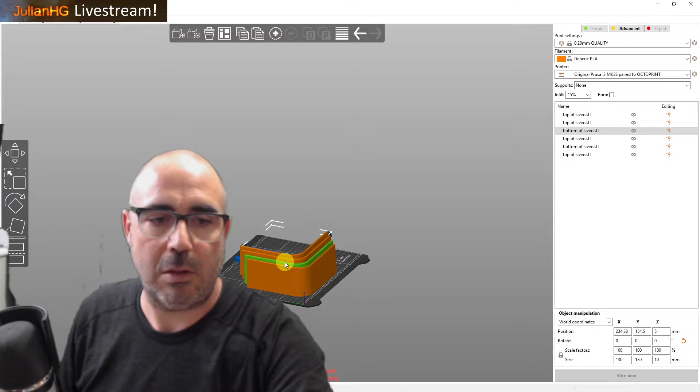But for this example, this is the beauty of cutting it into quarters, you can actually fit lots more on your printer. So let's just get rid of all of them bar one of each, and arrange it just sort of nicely. I won't do the mesh pattern for now.

And all you do is select your quality - I'm doing 0.2, bog standard. PLA is the material I'm using, that's the easiest and most cheap material there is. Infill at 15%, that's perfectly standard. Now I like to use an infill gyroid, it's kind of slow but nice and strong. And that's essentially it, you click slice.

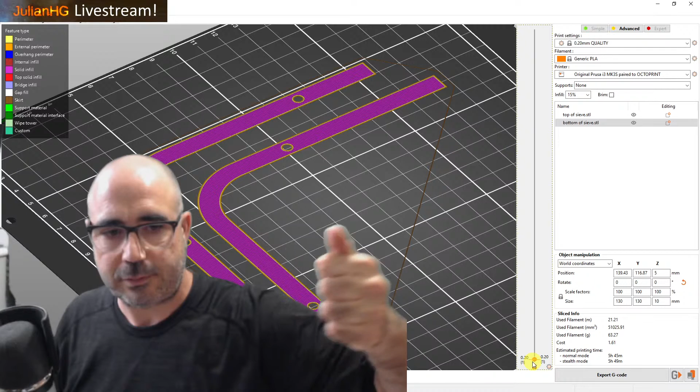Wait 10 seconds... done. And then the program has essentially got all the 3D instructions for your printer, your toothpaste tube of plastic, just to go. So at first it'll do a flat plane like that, and then it'll go up, and then it'll do the wiggly - oh, my face is too big again, face too big - essentially that's it. And you'll notice that where it comes to the holes, it'll do those as well - it'll go over and then overhang and then fill over the gaps. And that's it.

So what I'll do is I'll print these. I will probably put in the nut traps just to make removing the things easy. And then we'll cast it on the next part.